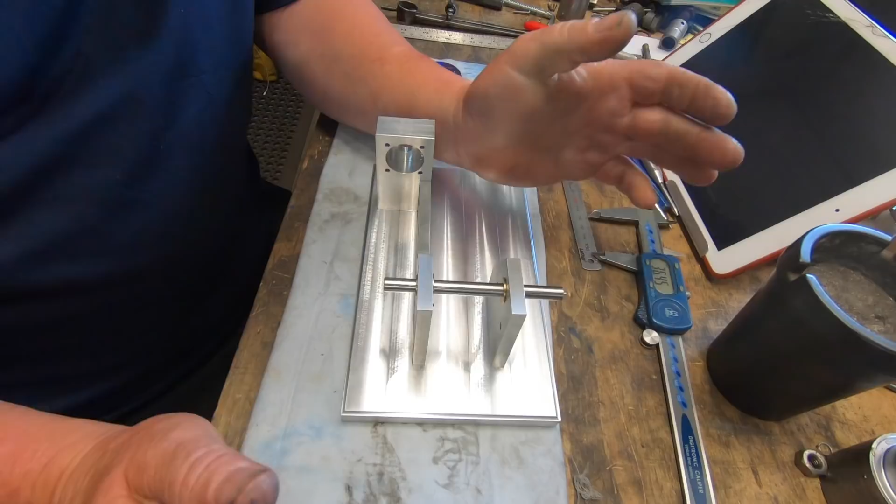Right, back to the engine build. Bit of a catch up here. I've gone ahead with some machining - straight, no fancy turning involved.

I didn't have any bronze for the main bearings, so I've gone with brass, considering the amount of time it's going to be run. If it gives grief later on, I can always make a set of bronze bushes. But I had brass on hand, so I've made the brass bushes.

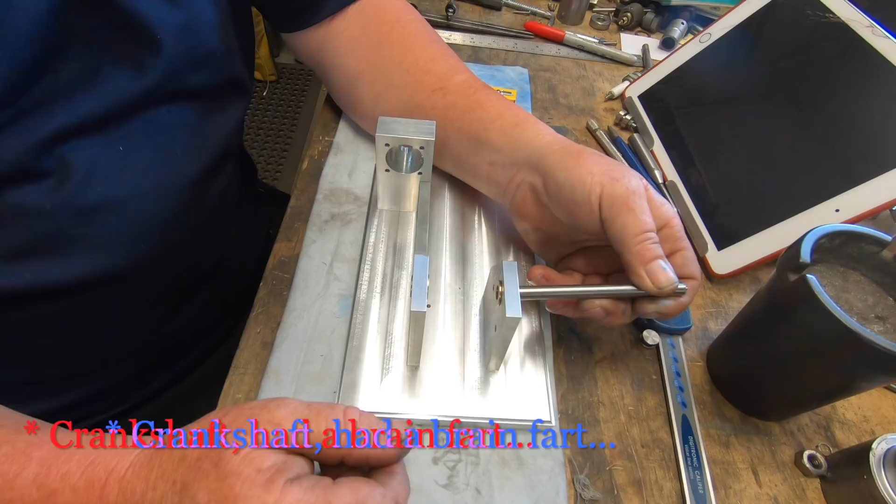This is a piece of shaft that I machined down for the crankshaft - machined and polished down.

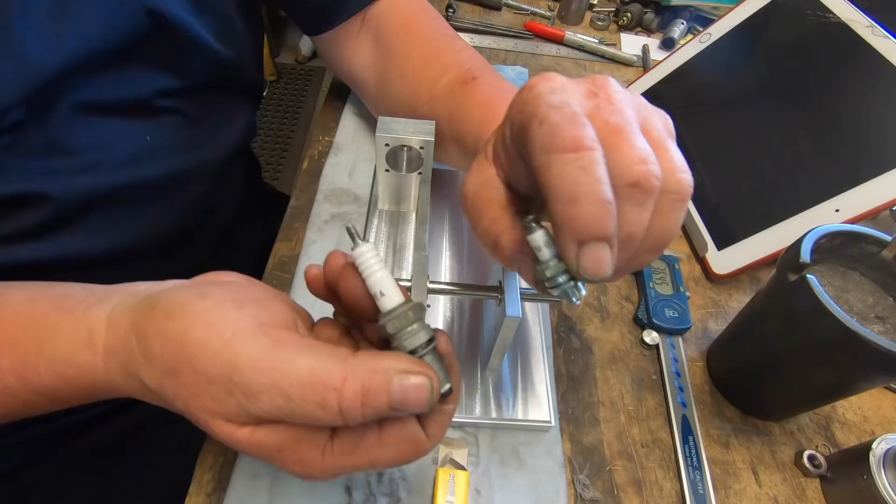The spark plugs arrived. I never thought they made them this small, but ain't it dainty? It's tiny - there's a normal size one next to it for comparison. So that's arrived, which is a great thing.

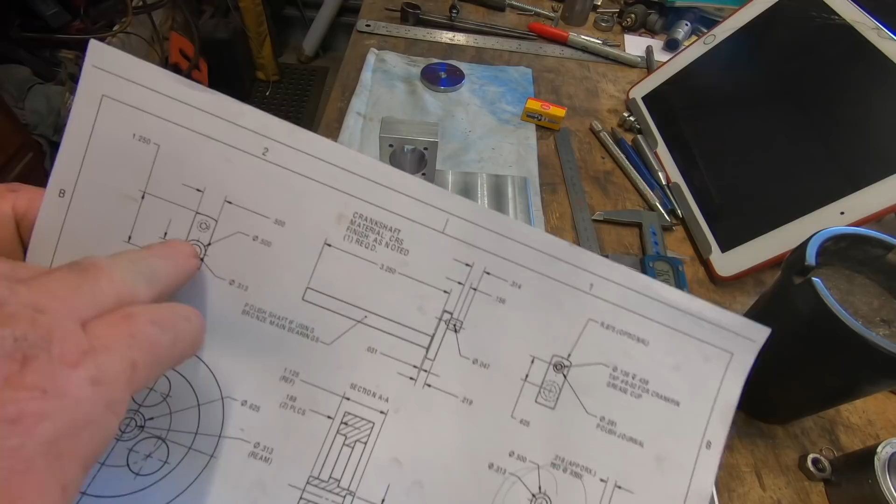Now on the plans, if I can find them - on the plans for the end of the crankshaft where the conrod connects to, this one here is only square, like a rectangle shape. After a bit of Google searching and forum reading, a fella's actually redesigned it with a weight. So there it is. He was kind enough to share the dimensions, so that's what I'm going to be doing.

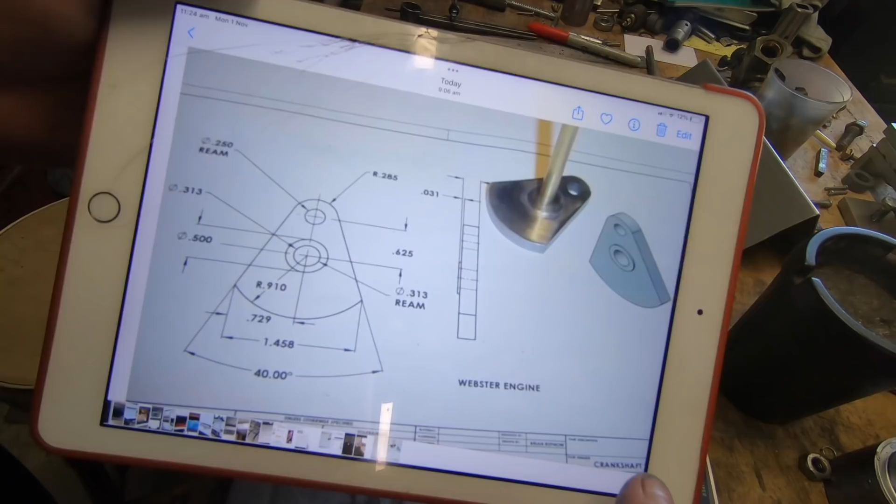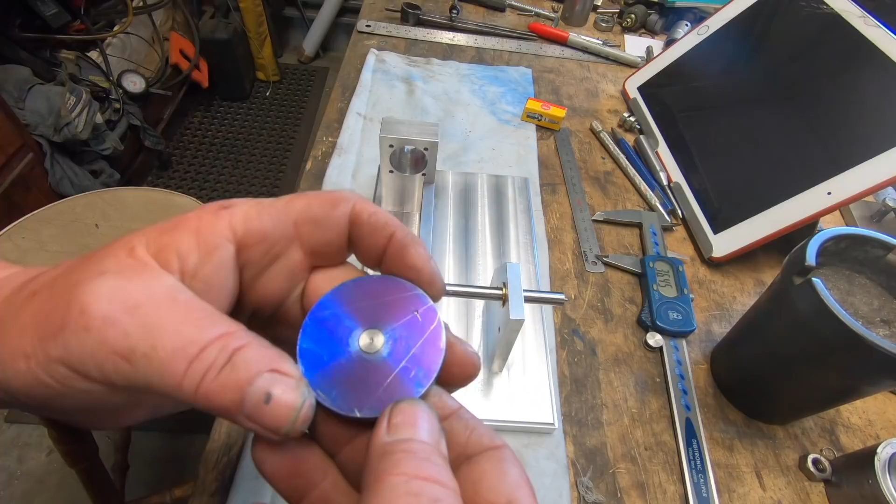So what I've done is machined up a disc that's got a hole in the centre, a reamed hole, 313 thou to match this pin. It's got a 31 thou shoulder on the back, so when it hits up against here, it obviously steps off.

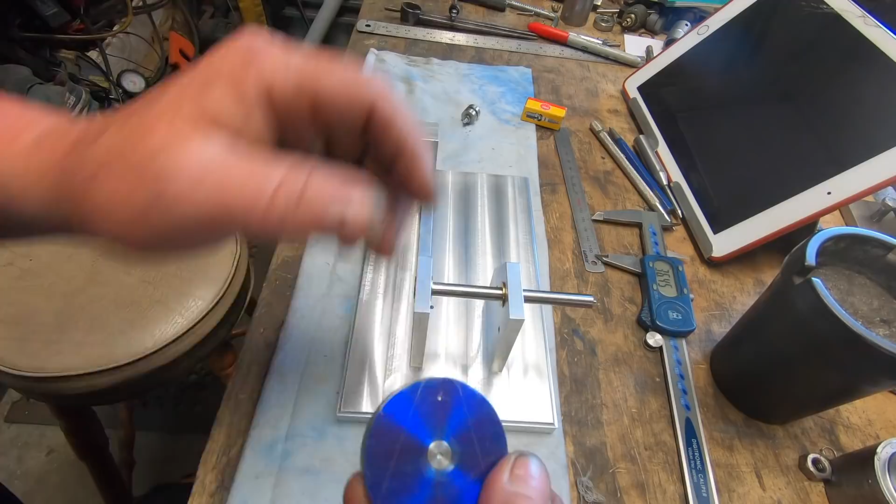It's 625 thou centres. There's got to be a 1/4 inch pin going here, shaped obviously. Now I've made up a set of filing dies that I can use to file this end to suit, once I've machined this off, drilled the hole, and machined these two outer flanks off. I didn't show turning this because it's just plain turning, and it would make the video 50 times longer than what it's meant to be.

So I hope you don't mind, but anyway, what it is what it is. So I'll go to the mill drill, we'll drill this hole, drill and ream this hole for the pin, and then go to the Cincinnati, and I'll machine these two pieces off here. Then it can be Loctited to this shaft, and Bob's your uncle - supposedly. So then we'll have a crankshaft in place.

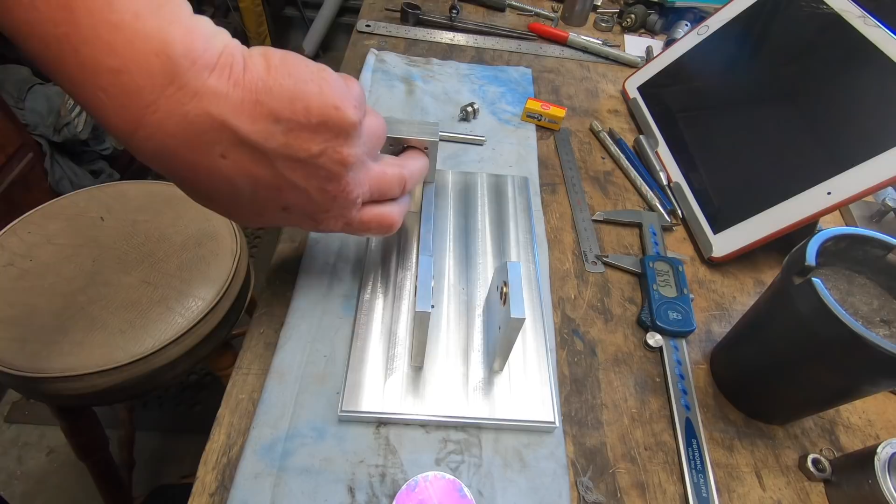Now I'm still trying to source some cast iron to make the cylinder. Finding it very hard to find at the moment - pain in the ass. I'd rather make it out of cast iron, be a bit easier than trying to - I actually made a dummy one already.

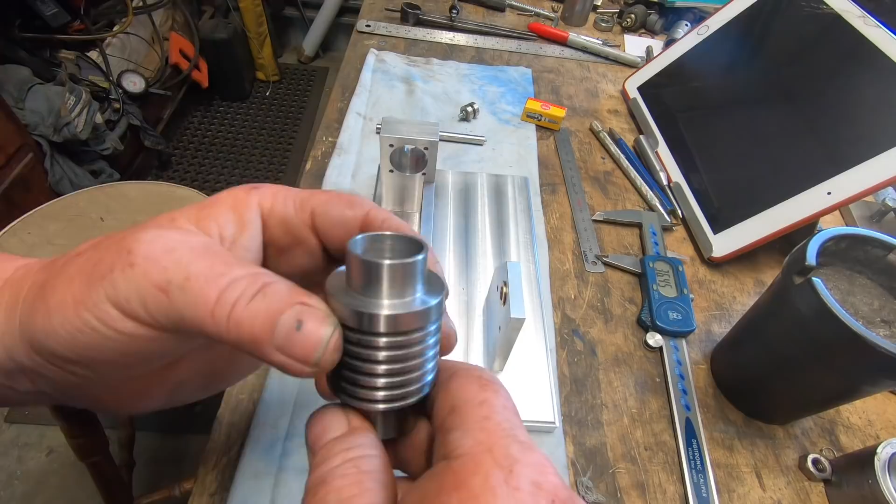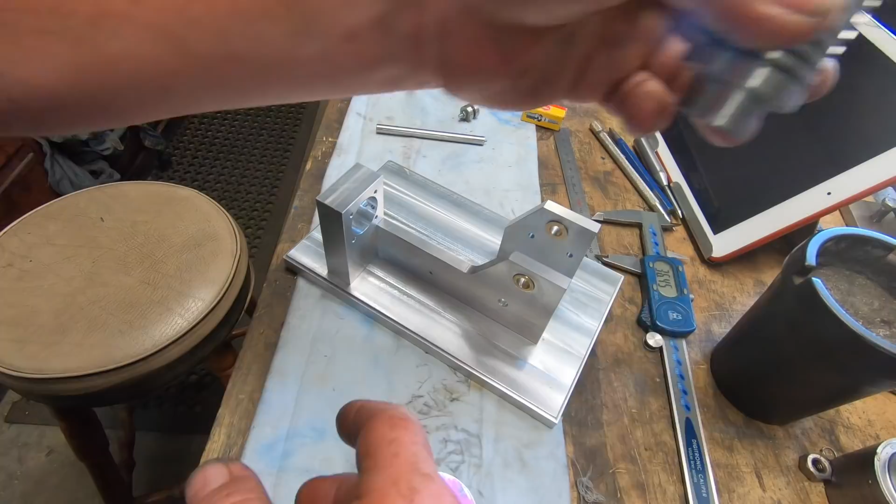Boring bar let me down, so I've ordered a new one. But that's going to fit in there like that. I actually stuffed up a couple of times on this one - oh, it's a good fit. Stuffed up the grooves, but never mind. And the internal bore's pretty shit, so that's going on the shit shelf. Anyway, we'll go and get this one done, and that's another component finished.

Slow this mill down now, change belts around, and I'll ream that out to 1/4 of an inch.

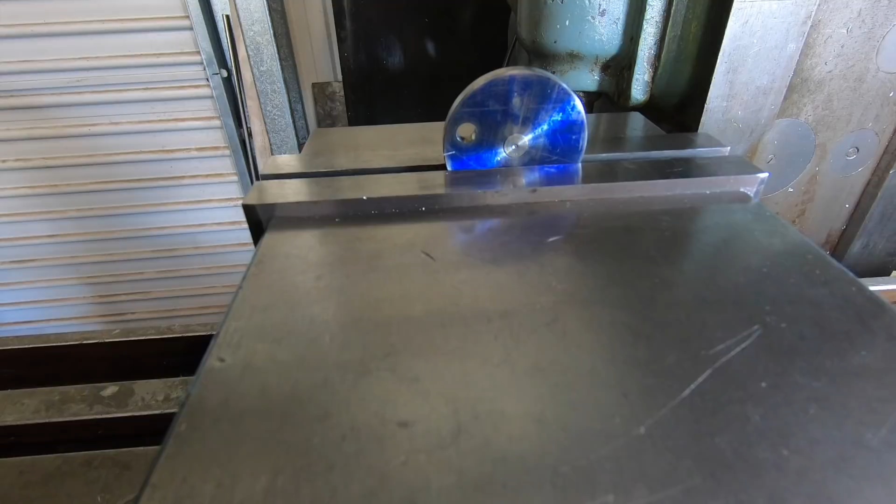Okay, over to the Cincinnati, and we'll knock these off now. I realise this is pretty hard to see over here, but what I've done is stuck a parallel there. I don't know whether you can pick up those scribe lines or not, but simply just line the scribe line up, mill it down to that line, turn it around, and do the same again. So that's what we're going to do.

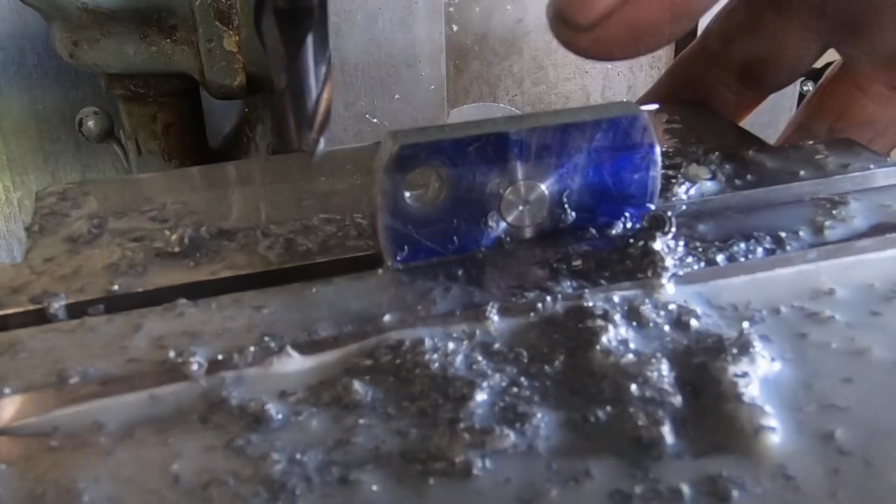Not really, I changed out to a 3 flute end mill. Not overly impressed with the finish, so I'll just have to polish that by hand. Anyway, I'll flip this over now and do the other side.

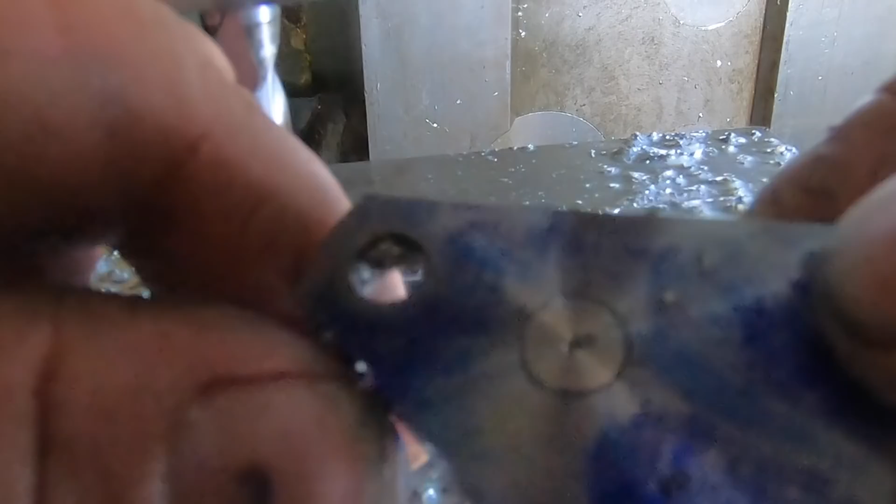That's that. Give that end a clean up now and show you over the bench. Off camera - I didn't bother filming it because it's that bloody tiny, it's hard to film.

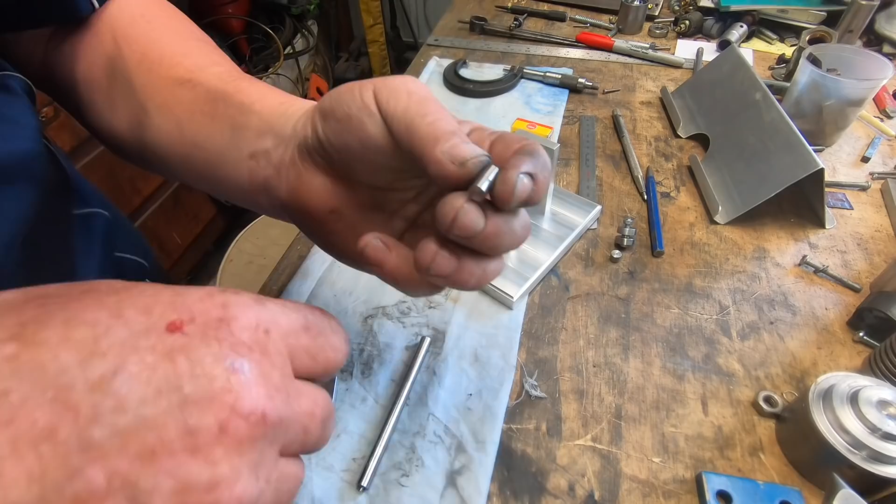But this pin is where the conrod connects to - that's going to be Loctited in place. It's got an M3 tapped hole there. It'll have a 1mm cross hole drilled in it at a later date, and a little oil grease cup will go on the end there. So that's going to be Loctited in. On the end, you get yourself a crankshaft.

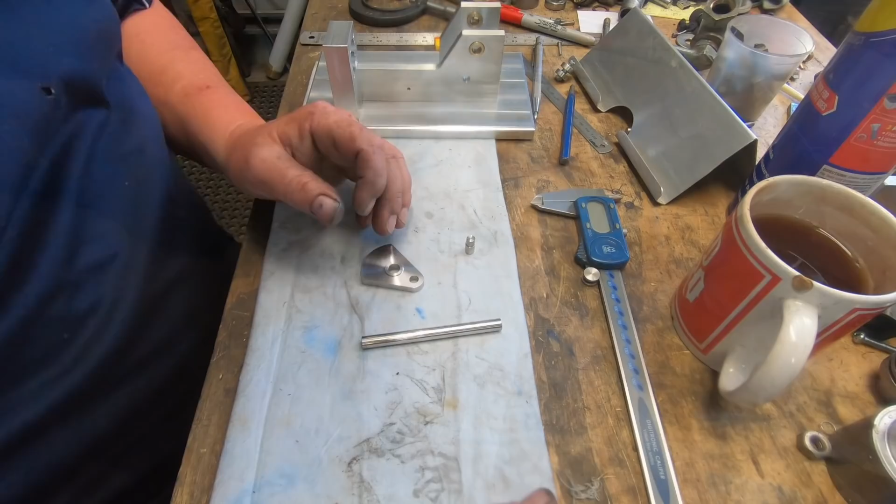Right, it's time to Loctite these together.

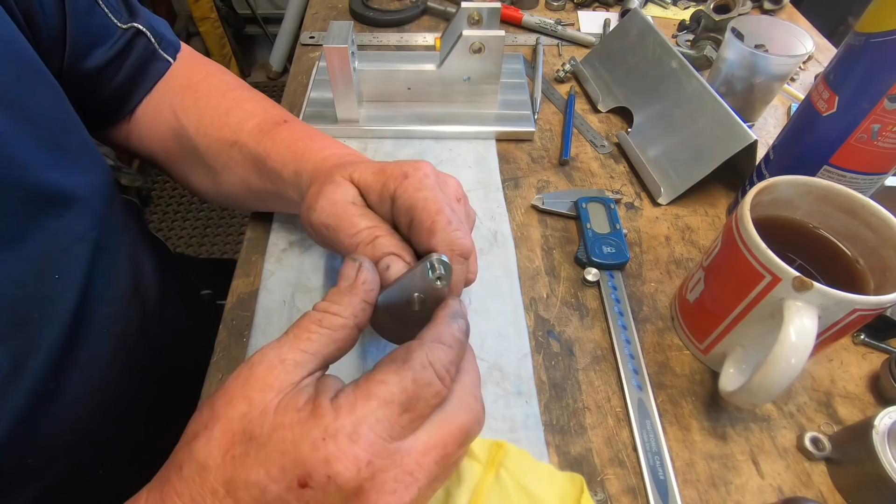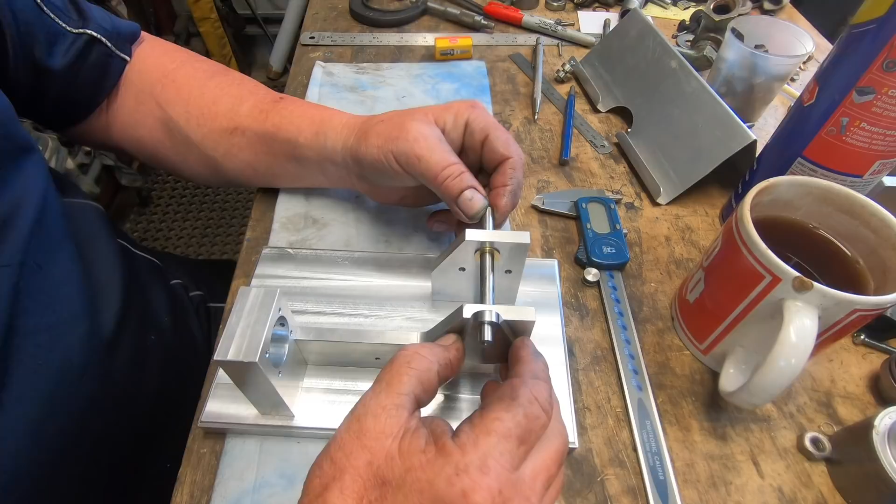Spins nice. I can't pick up any play or anything in it. So as far as hitting the numbers, I think I'm getting pretty good, I'm hitting them okay.

I apologize for not recording every bit of the build, but some of these parts, like machining this down, was just straight turning. Machining this little dovetail here, it's that small, it's hard to film, and it's just straight turning, nothing special. So I hope you don't mind. If you do, please let me know in the comments and I'll try a bit harder, but it's going to get pretty boring if I'm just filming normal turning day in, day out.

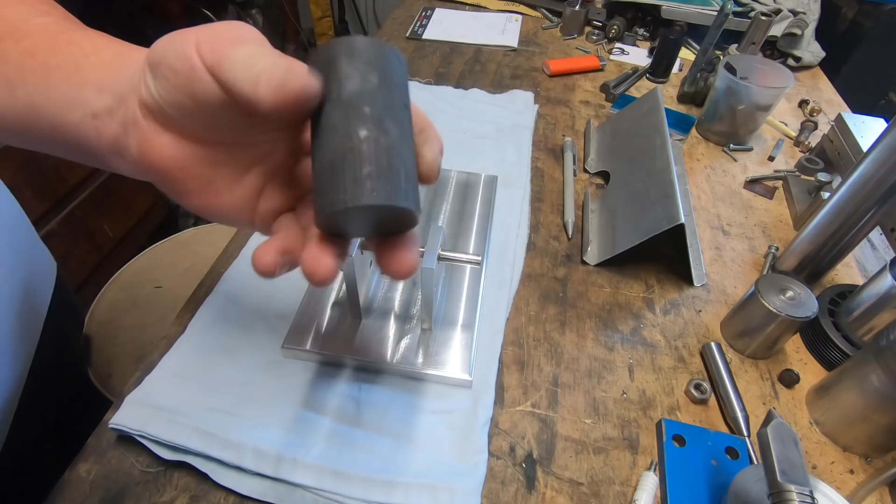I'm pretty stoked with the way that looks, I'm really happy with that. I was kindly donated some cast iron for the cylinder, so that's what we're going to make next.

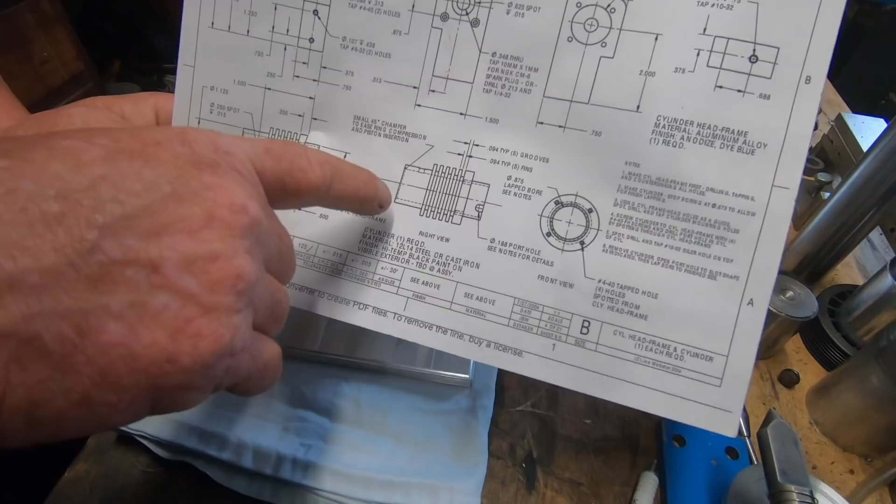It's 2.5 inches long, it's got some cooling fins, and a 0.875 bore through it. That's got to be really smooth because I'm running Viton O-rings, so that's going to be a bit of a challenge to get nice and smooth. There's a 4-hole pattern to tie it into the cylinder head frame, just going to transfer them through with a drill from this side, so that's easy enough. It's got a little intake port here on a bit of an angle, goes in through the side here, that's easy enough to do.

So pretty much it's just straight turning and boring. I've ground up a form tool to put these slots in, so hopefully I can get them pretty much all even and looking nice, but we'll wait and see about that.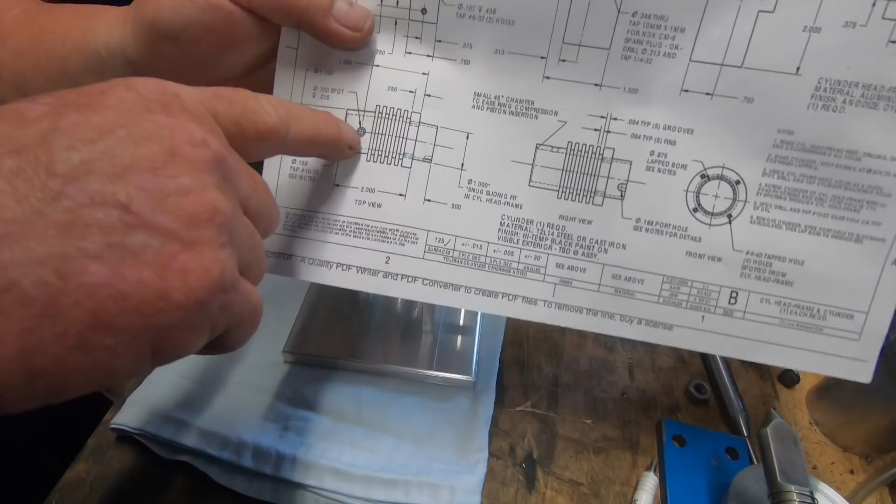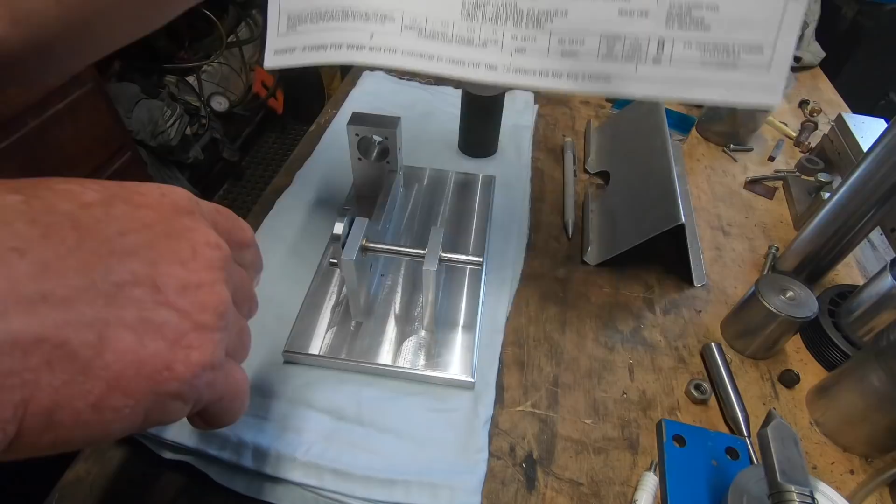My plan here is to turn this shoulder, this section, then hold it in the chuck on that end and do the rest of the turning so the bore is concentric with where it bolts into the housing, into the actual mount. That's the plan. Whether it works or not, well, we have to find out, we'll have a go anyway and see what goes on. I haven't really turned cast iron before, so this is going to be a new one for me.

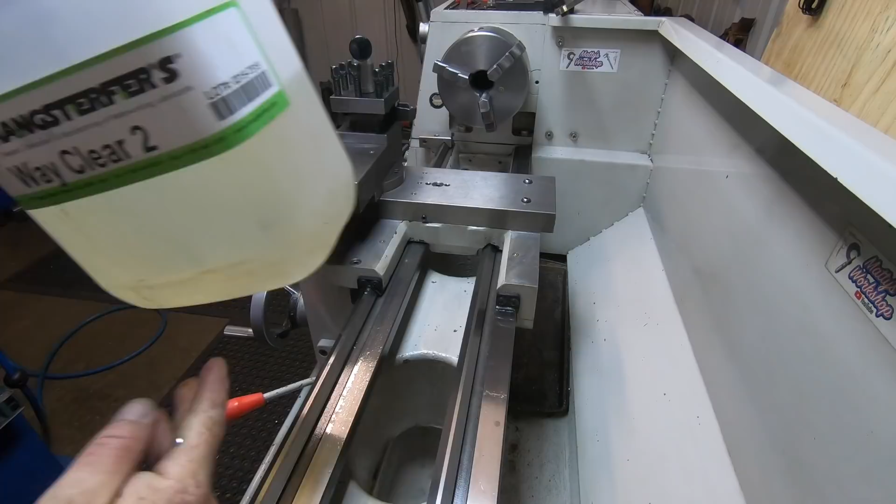So the first part is just to face this off, then I'm going to machine down to 1 inch 125, 800 thou in from the end.

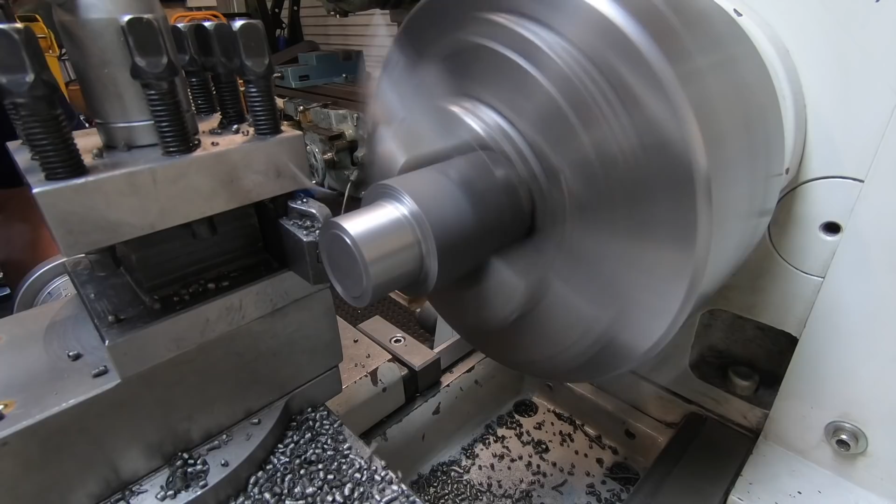Eight, 10, spot on. Shit hot.

Okay, now what I've got to do is turn this around and hold it from this end, taking in mind I've got to leave enough room to be able to get it in close enough to do all the fins. Something I've got to keep in mind.

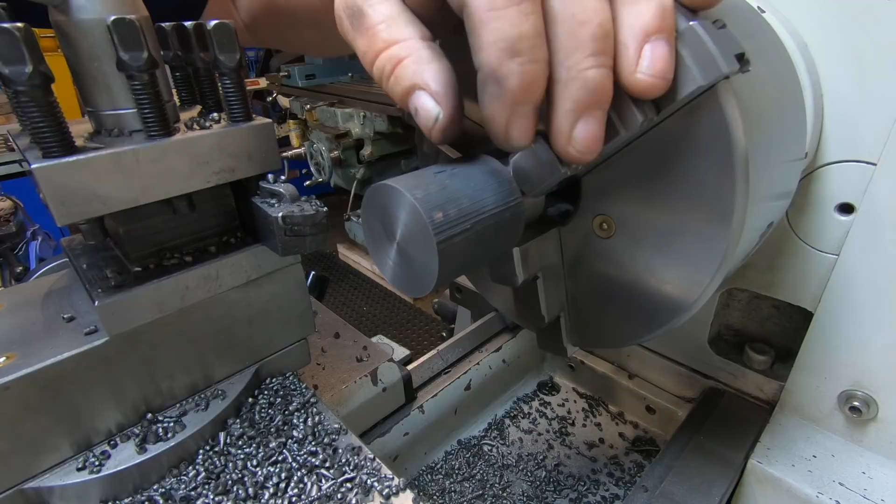Okay, I've just machined that to length. I'm just going to get the slag off the outside here, hard shit, and then bring it down to 1.5 inches.

Now I've got that hard, there's a bit of shit there. Now I've got that hard crap off, I might go back to a high speed steel and try and get a better finish.

So we're 1.5 thou up. Might leave it like that for a minute, and I've got to come in here half an inch from this face, back half an inch down to 1 inch.

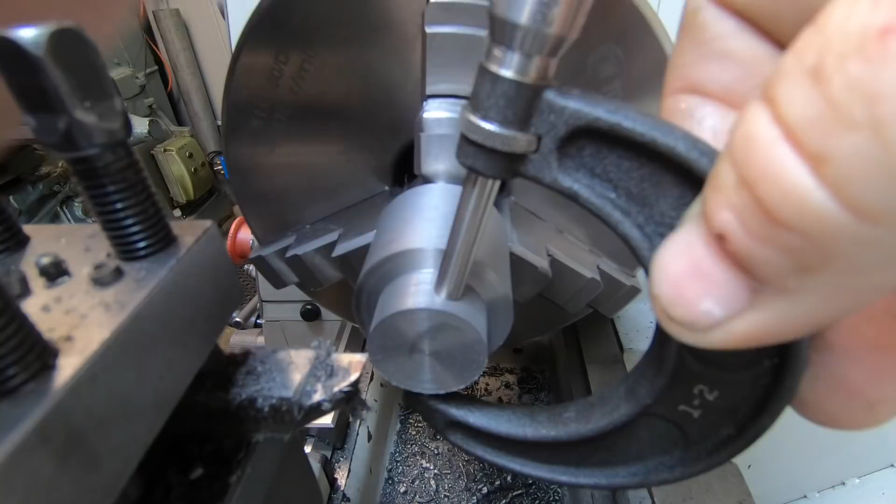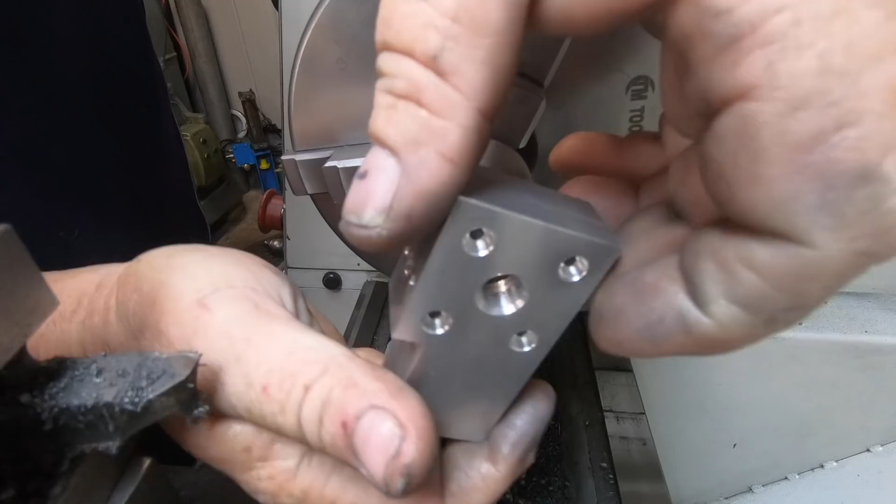Righto, I'll bring you up to speed a bit. Camera went flat. All I done was polish this down. Polish that till I got a good firm fit. That goes up nice and snug.

So what I'll do now is try and get that off. I'm going to put the bore in there now. So I'll just center drill it out, and then I'll bring you back when I'm boring it.

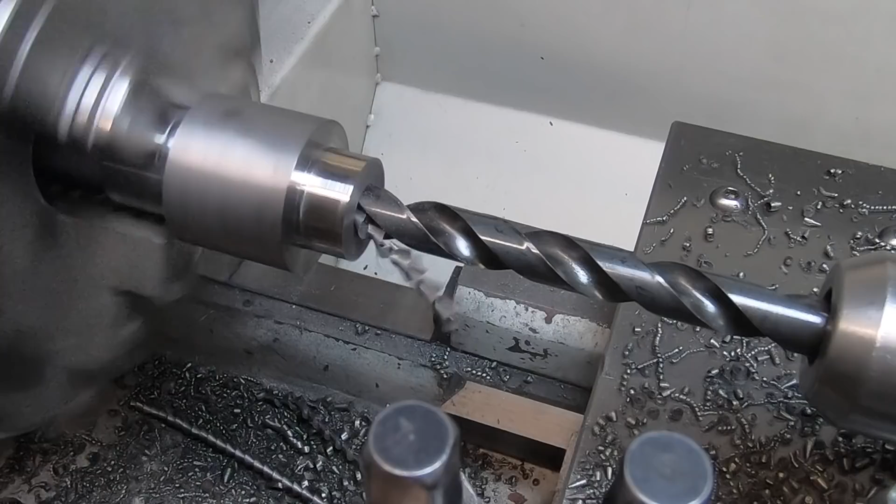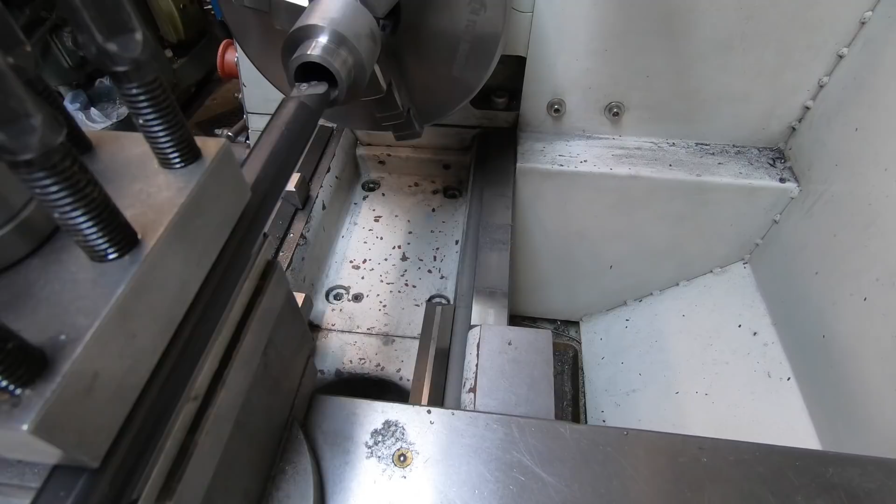I bought myself a new boring bar, 16mm boring bar, just an eBay find, nothing spectacular. So I've got about 125 thou to come out of this.

Starting to sprinkle rain again, the bastard. Rained all day yesterday.

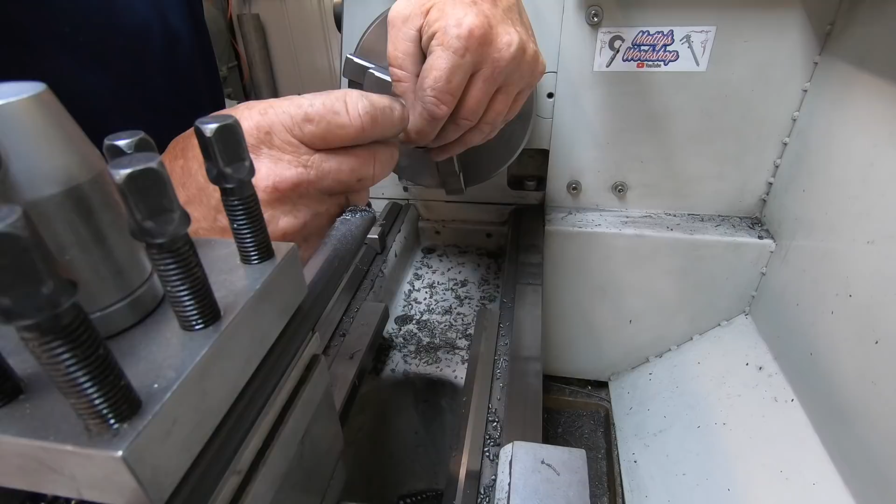Oh shit. Half thou over. Oops.

Feels the same all the way. Oh, I just have to try and polish it up where it is. I don't think half thou is going to hurt too much, to be honest with you. I know I've got to come up with a way to polish that now. Got no freaking idea how to do it, but anyway, we'll come up with something.

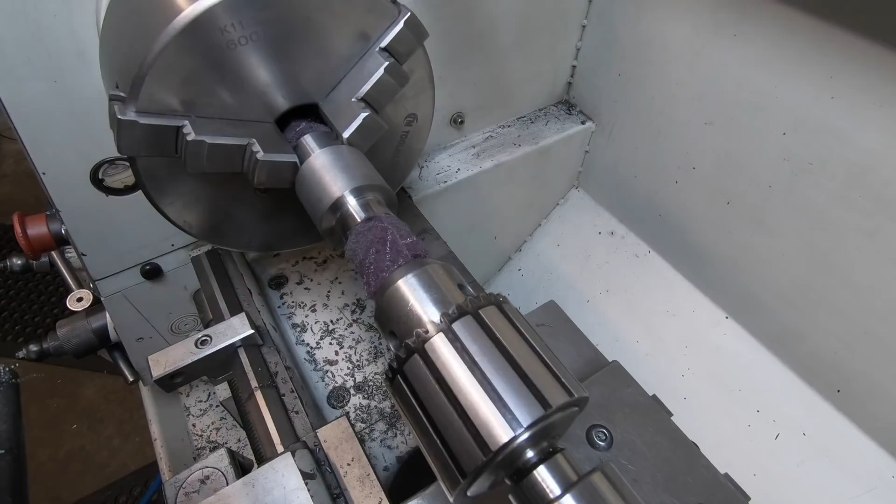I don't know how good this is going to work. What I've done, I've got a piece of rod in the drill chuck and brand new piece of Scotch-Brite. Wrapped it around real tight and jammed it in there. You got to hold it here, stop it spinning, but...

Bloody smooth. Give you a look. I think I might just bloody well leave that as it is, you know.

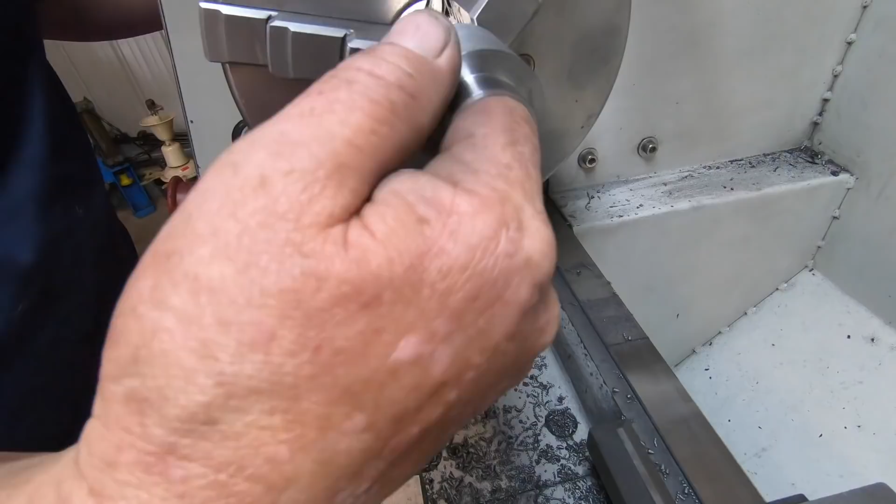I bought a wheel cylinder home. It says on the box when I ordered the whole lot, it said to go down to 19mm, 3/4 of an inch. You know, drama. It don't fit. Simple. It's too big, so I can't hone it. And I'll be running Viton O-rings instead of cast iron rings. And I reckon that'll be good enough myself.

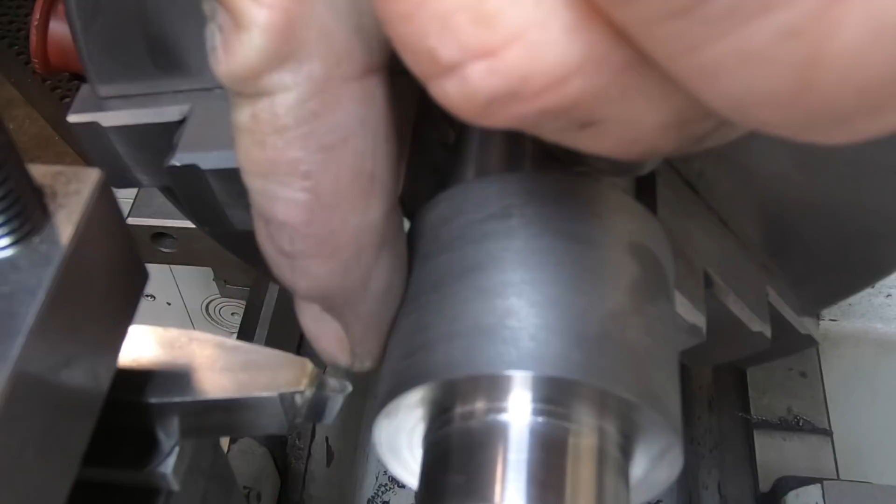So what I've got here is a radius tool that I've ground up. It's about 95 thou across the widest area there, with the radius in there, obviously on the end. So it's got to have a quarter of an inch here.

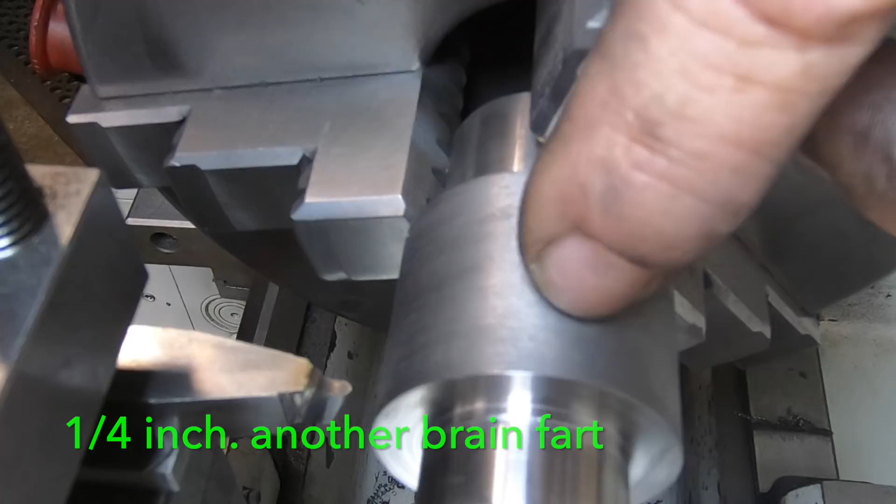That actually gets 4 bolt holes threaded in it, and then 5 grooves, which will give you 5 fins, obviously. So I found where I am in space here, and I've got to go in 187 thou, 188 thou from touch off, and just keep working my way down. That'll come obvious in a minute.

That's 100 thou. 188. Nice.

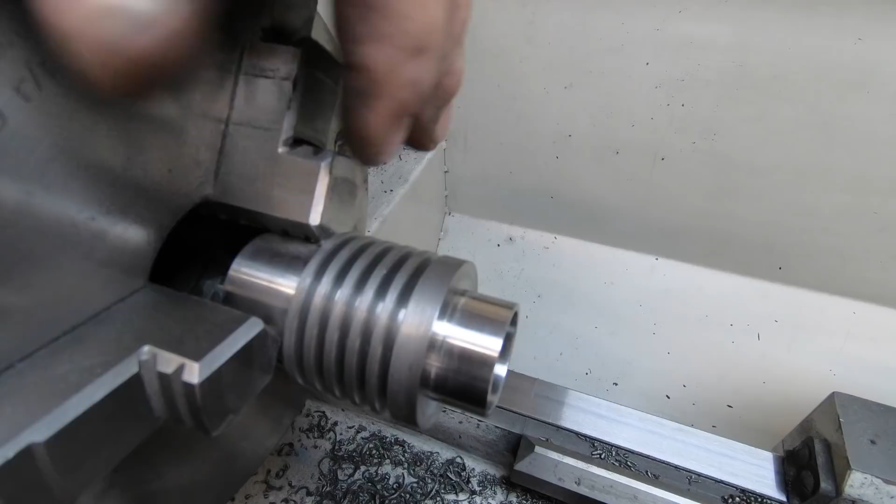That actually worked out way better than what I thought. I just have to get a bit of emery on there now and polish them fins up. They actually look pretty even. I was a bit worried about this last one here not being quite right, but it actually turned out pretty good.

As for the 250 thou here, 252, 251 - I'm not complaining about that. That was just a bit of arse, I think, more than anything else. Anyway, I'm going to get this cleaned up, and then we can put the 4 mounting holes. There'll be M3 holes in the end here.

Okay, so this is what we ended up with off the lathe. It's not a bad looking ball. That Scotch-Brite actually worked better than what I thought. It's not a bad fit.

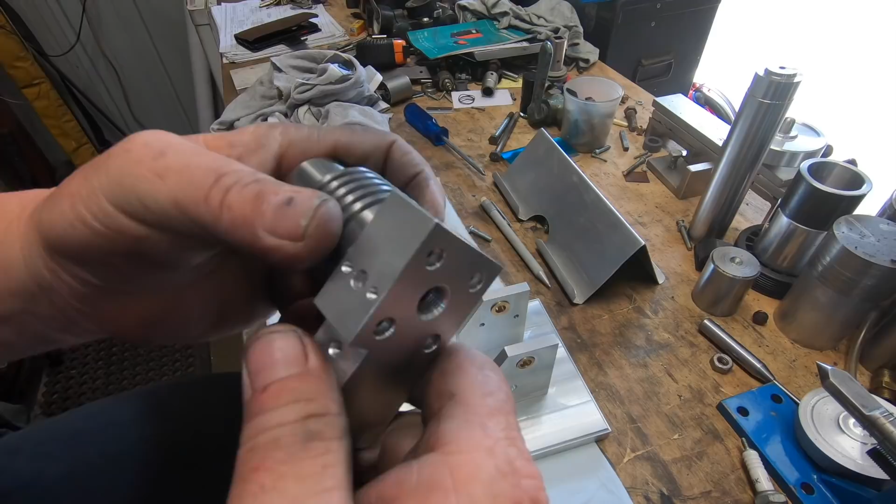Don't come off. So what I do now is I use this as a template to just put a mark where all the holes are. Set this up in the vise, drill them, tap into 3mm M3. Then I've got to come in with an end mill - I forget the size - and go through the side of the cylinder, through this hole.

And once that's done, the hole will be offset there, obviously. Then I've got to mill that piece out. So a little bit of fiddling around, bit of fiddle farting around, but that's a good fit. I'm really happy with the way them grooves turned out. They worked out way better than what I thought.

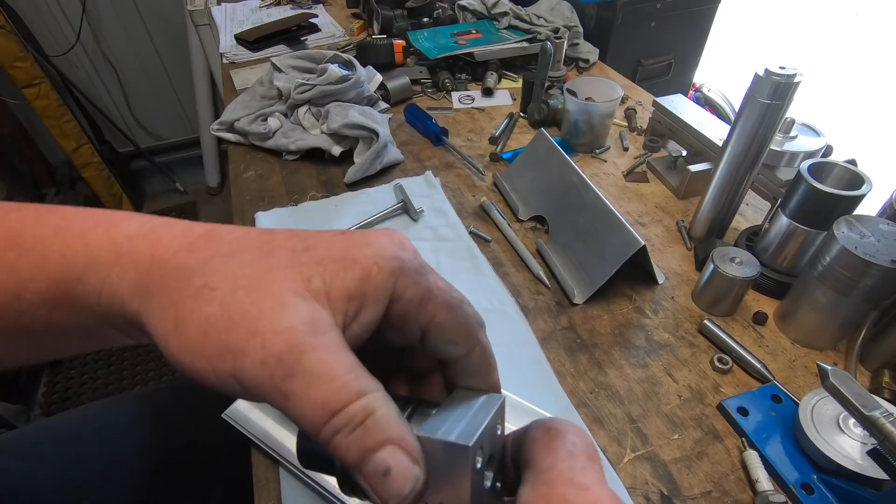That's how it'll look on the engine. Right, I'm getting a bit shagged for room on this table. I've got the vise set over to one side and I've got the rotary table set up on the other side, because probably next I'll be doing the con rod's coming up very soon, so yeah, I've been having to fiddle around with the rotary table.

Now this is probably going to be the complete wrong way of doing this, but I'm just lining them up by eye and just drilling, tapping, move around, line it up by eye. It locates quite well in this, in the upright. I don't think I'll have any dramas.

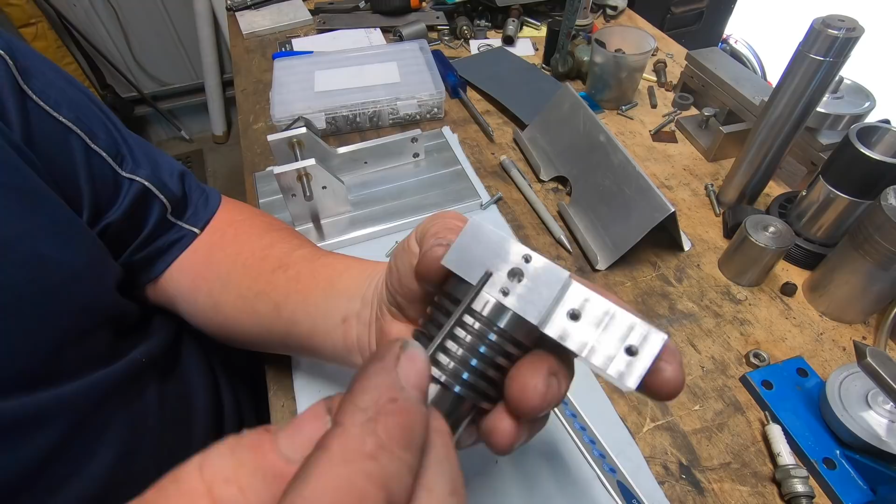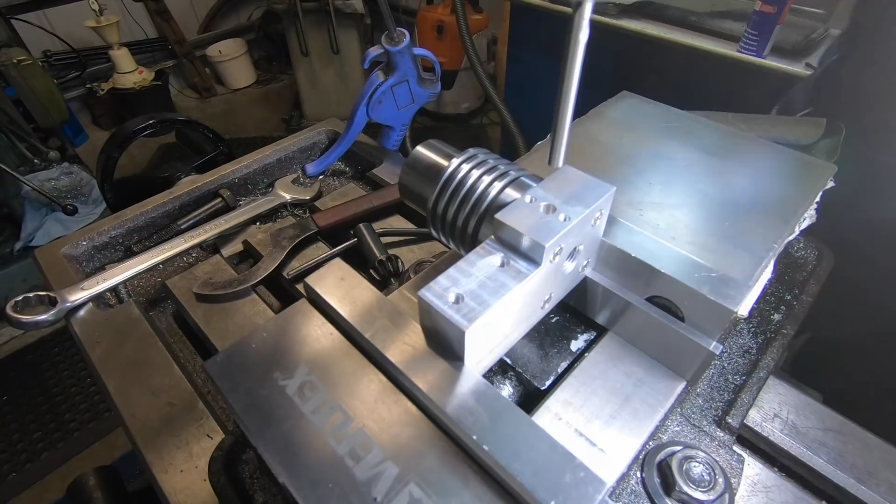So what's got to happen now is, this side is where the intake manifold goes on with the valves in it. I've got to open this hole up into the cylinder, so go through the cast iron. So I'll mount this up in the mill, line it up with the cutter, go straight down, take this out off this mounting bracket and align it the best I can with the cutter, and then you'll see what I mean. I've got to mill that into a slot. So this is probably another complete wrong way of doing it, but we're going to do it this way.

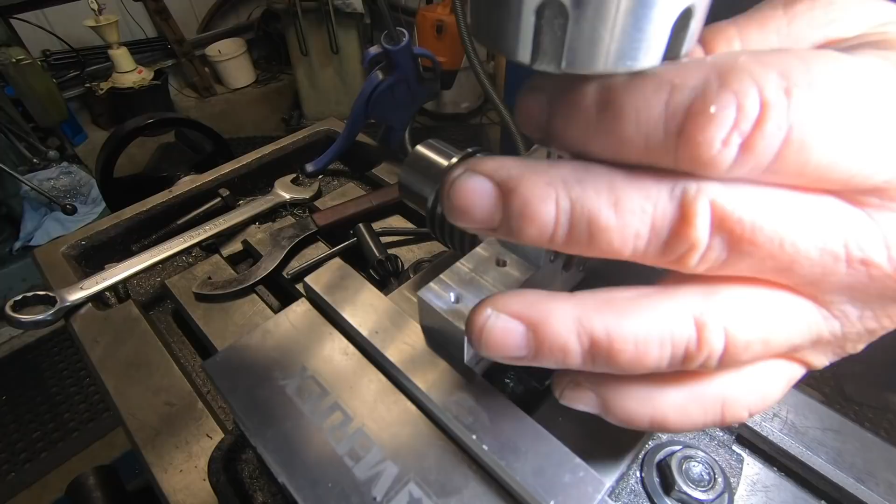So this drill, it's a 3/16 brand new drill bit. It's actually pretty loose in that collet, just sort of grabbing, so I can go down in that hole. If it was touching on the side or anywhere, it'd bite, push up, but that's not. So to me, that's lined up good enough. So I've just got to get a 3/16 cutter now and go through that hole.

That went way better than what I thought. So what I've done, I've got it sitting on a parallel, which is just sort of grazing there at the moment. I've got these holes here, these two top holes sitting level, and you see that just goes straight through. So what I'm going to do is just very carefully mill that out.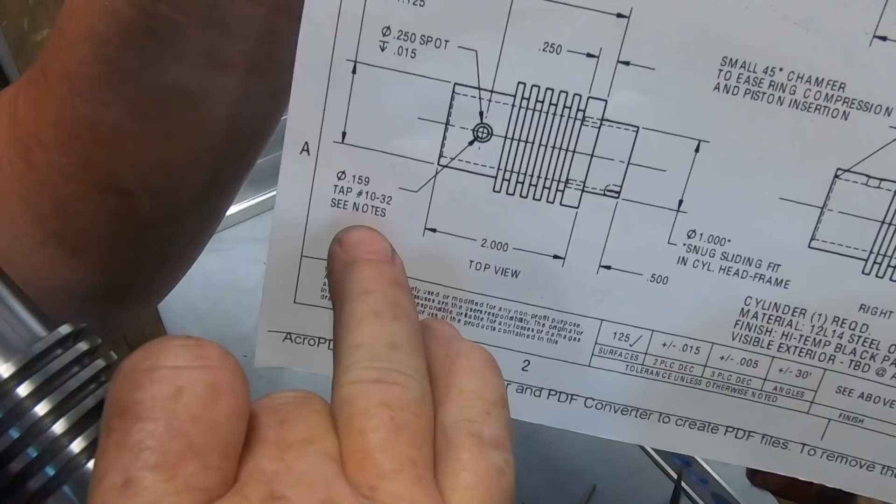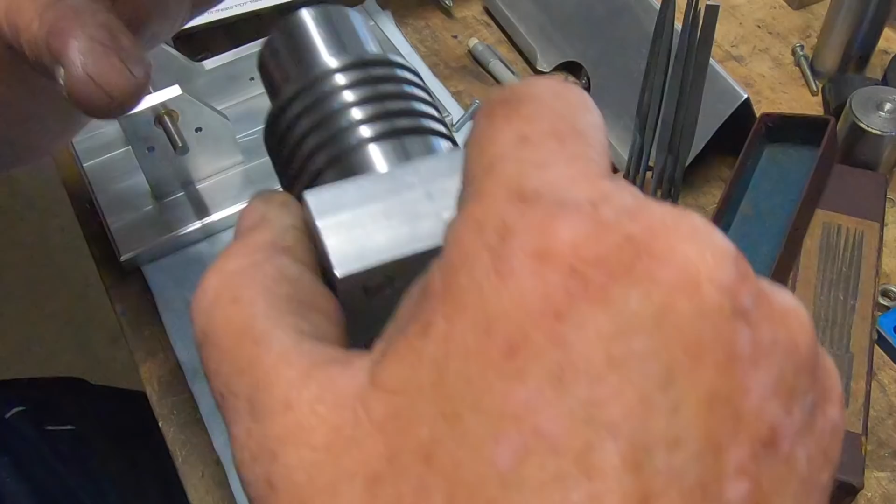All this needs now is a hole at the very end here, which it says here is a 10-32 threaded hole. That's for an oil cup at a later date, which I'm not going to worry about at the moment because I haven't decided whether I'm just going to put little - I don't know what sort of oil to put on it yet. I just don't know what to do yet. Anyway, as far as that bit goes, that's done. That can be bolted up again now. And I'm pretty stoked by the way that's actually turned out, to be honest. Way, way better than what I thought.

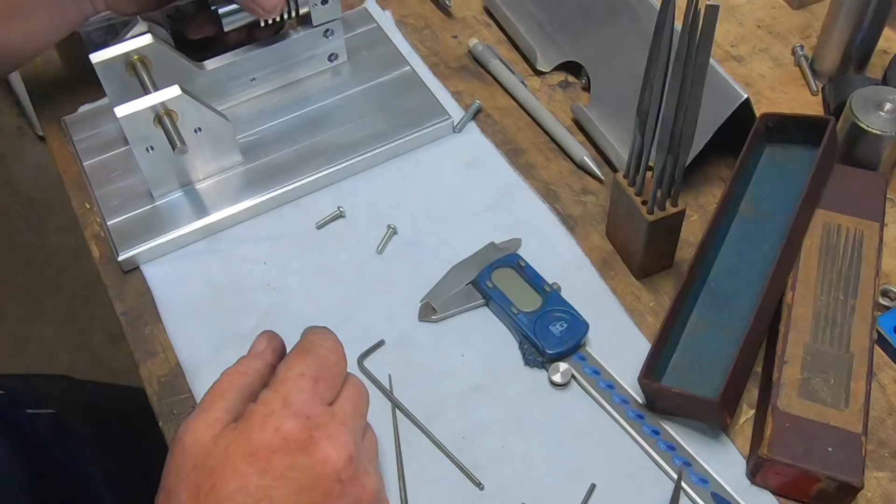Next will probably be either the piston conrod or the flywheel. I haven't decided yet. Conrod's going to take a bit of doing. Never made anything like that, so just wait and see.